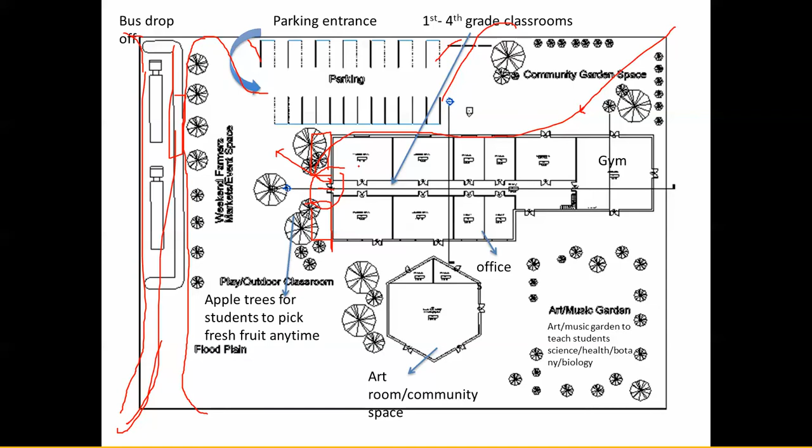Now, some more things to look at in your plan. When I was looking at your second floor, it looks like you need a fire stair at the end of that corridor. You could put it on this side or that side, or do the stair any way you want, but you're certainly going to need another stair, because if I enter here and want to go upstairs, I'd have to walk all the way down here to this, which is probably unlikely. Typically this would also be a fire stair with access to the outdoors in case of fire. It's not unusual for a school to have two fire stairs, one on either end—that's the cheapest way to do it. So you could take a look at that also.

I can't read all these rooms, so I don't know what that room is, but the other idea is to have an entry here as your main entry, and then a card access entry here where only teachers, parents, and students can get in, so that visitors would park their car here and enter the school here. Of course that'll change the shape and size of your building, and that might be okay. So that's a major consideration—do you want to make this the entry? Typically you have an entry here if you were doing a school like this, with a fire stair down at this end, and then you have nice access right to the outdoors, which is actually pretty good.

Now, I like the farmer's market idea here.

I'm wondering if, depending on how you design this space, the farmer's market might really want to be right on the corner of the East Falls neighborhood. Maybe it lines up right on the street, or maybe this whole thing becomes a farmer's market, which is a great idea. And if your entry into the building is here, people could come in from the farmer's market and use the bathrooms. I can't tell—maybe this is a boys and girls room, I'm not sure, but that would be great.

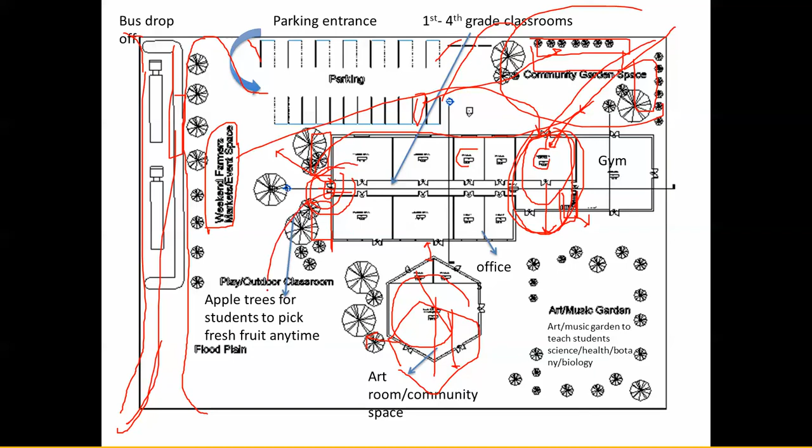I know you're going to have some stormwater action here, and I would probably have the art look that way into this. When you draw your trees, don't be shy—put lots of trees in. You're really trying to create a buffer between the school and the city.

So you're really looking at something like this, and then here you might look at some more trees that are more sculptural. But what you want to try to do is create a space that kids would want to play in, or do art or music in. So that would be something that I would suggest to you.

There was something else I wanted to share about this one plan here. I think this looks like office space, which would make sense to be near the front entry. And I do apologize for having you rip up your plan.

This dimension right here would be 24 feet—that's the minimum requirement. And these typically tend to be 20 feet. So I'll assume that you've got that as the right thing. So the main thing here is entry.

I would move the entry to here and have a much more urban solution—just do a card swipe here, or have another teacher stationed there in the morning for when people get dropped off.

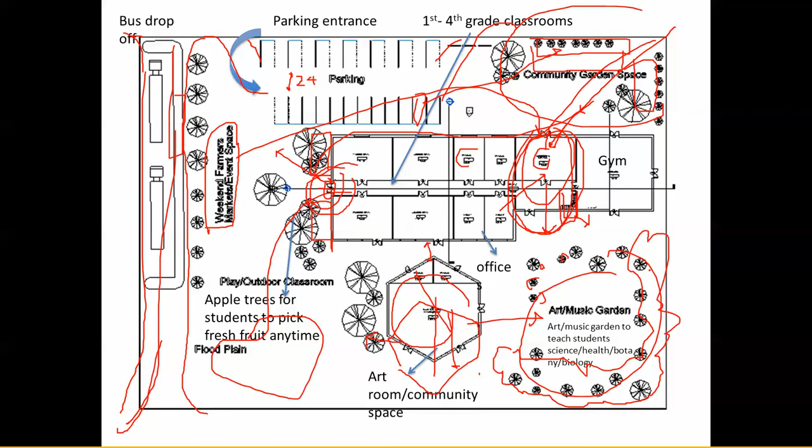Now on the second floor, obviously here's where you see the reason you need the stair. This corridor has to go all the way through and has to link out to a fire stair here, otherwise people will die. If there was a fire right here, for example, everybody in these rooms would not be able to get through to this stair. I think this stair should be a fire stair.

Not sure what that is over there—that might be, maybe you were putting a stair there. I can't read what that says, so I'm not quite sure.

Then what's really interesting—so this again, I would move this down a little bit. This could be a really interesting space. You've got two sort of undefined spaces.

What you could do, which would be really interesting, is have a balcony here. So you move these doors over here, and then when people are walking around up here, they can look down into the lobby and walk down into the gym. So that would be pretty useful.

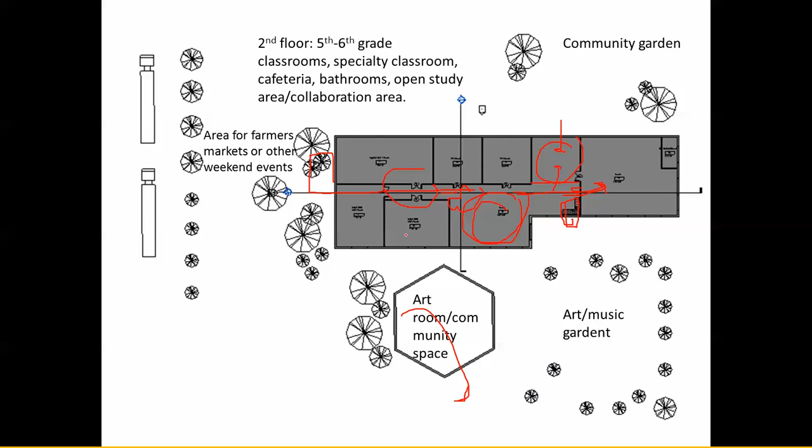This looks like—not sure what that is—and that would work out pretty well. Then you've got your fire stair there, and that should help your second floor be much improved.

Now, what I would do in Revit is go for the flat roof as your default, because you're going to be doing solar.

So you really want to think about your roofs as they're going to be used for solar, or you do a sloped roof that does this kind of action, where it gets very high. Oh, I'm wrong, I'm sorry. Let me fix that real quick because I don't want to have confusion. I think there's an eraser, right? Yeah, I really don't want this to be confusing.

What you want to do here is slope the roof this way. I would slope the roof that way and use an angle that's very good for solar, so that the panels can be mounted right on the roof. And what that also gives you an opportunity for is, in certain situations, to get more light in on the north side of the building.

So choose on the second floor, because you'll have a higher wall here. Or if you really want that, you could slope it here back at the end, but obviously you want to maximize solar based on your benchmarks.

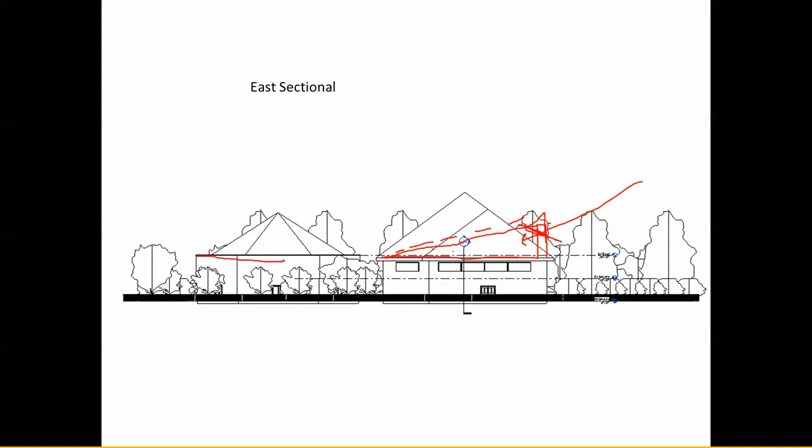Same thing here. Here I probably would go completely flat so you don't shade anything over here. And flat roofs can be nice. You have to think about parapets and such, but that should help. And here I think you can see that it's probably a little too close for comfort there.

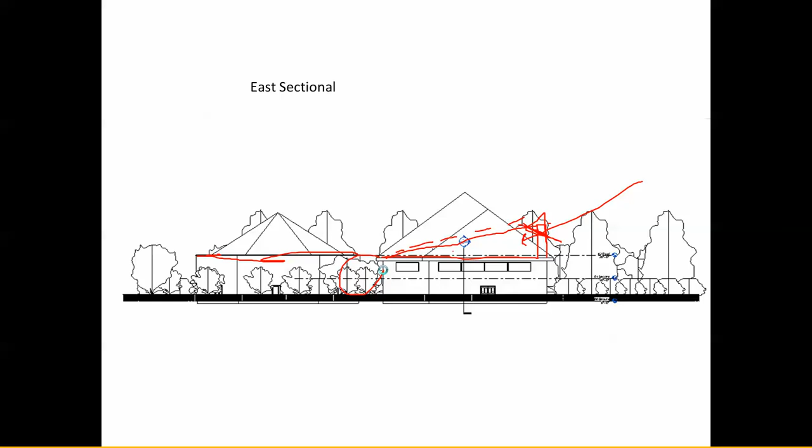So this is a north view. So what I'm missing is, on the second floor I probably have a lot of windows, if I'm not mistaken, that are not shown here.

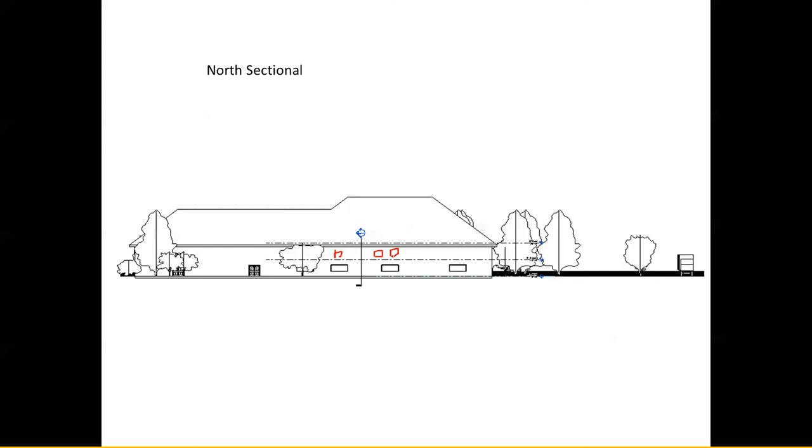So in a typical section we might do something like this, where you have... I'm going to explain this in a minute. I know it's confusing right now, but just stand by.

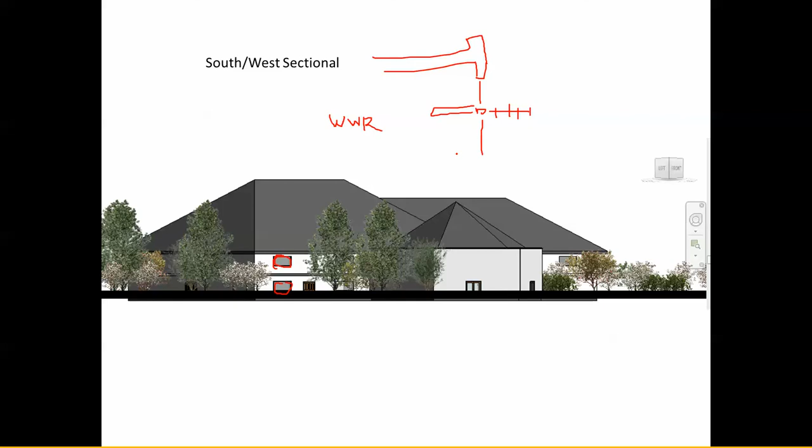We might have the most simple form, and by the way, when you have a flat roof you get a little parapet there. And here comes your floor, roughly. Oh, that's messed up, sorry. I don't want to be confusing.

So this would be your windows, and then your floor line is over here. So the sun is here. This is a section drawing. So here's a person standing here, and they are able to look out. And here's the wall here. This is a window right there, and this is a clerestory window here.

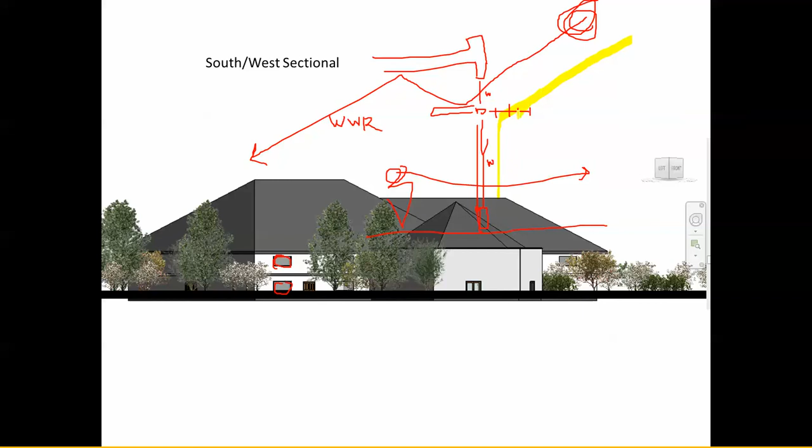So when you have the south light coming in, you get one of these deals where the light bounces back, which is really nice. And the other thing you can get is light coming here that gets shaded down by these little horizontal things. I have a picture of what these look like.

I just saw one, a prefabricated one, at Greenbuild. In the wintertime the sun is down here and the light will just stream in and help with your heating situation. So what I want you to do is take a look at this part of your building very carefully and try to think about how you could get the performance.

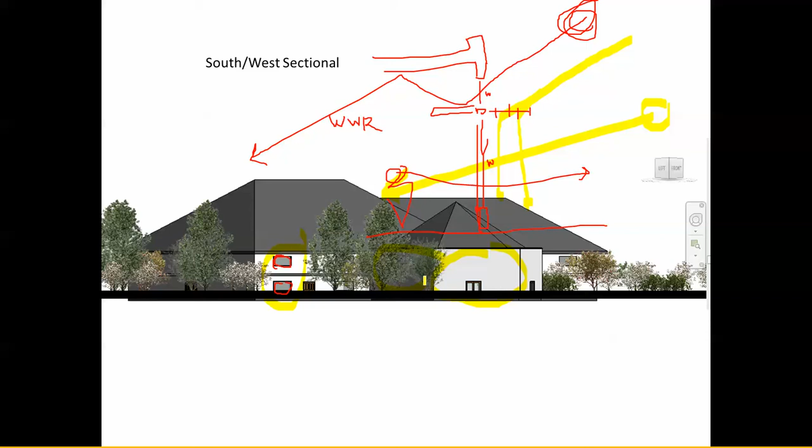I'm assuming there are windows in here. So this is really the next step that you're in, and I think we made some good progress here. So southwest, right, so you should probably try to take on your views orthogonal, meaning directly looking at them. So I think this looks like you're kind of skewed here, but this is straight on here.

Not sure what to say there, but I would definitely get rid of these roofs immediately. I know those are the default roofs in Revit, but I might try to get rid of those.

Proven to increase test scores.

Right, so that's what you want to spend a lot of time on here: really how you bring natural light into the building. You can build it in Revit, and you can cut a section at a bigger scale so we can look at it in more detail.

Really, I think that's your next task: the roofs, the windows, reworking the plans. The sooner you can get that, the sooner I'll give you more feedback. I do apologize for the delay, and hopefully this will be helpful.